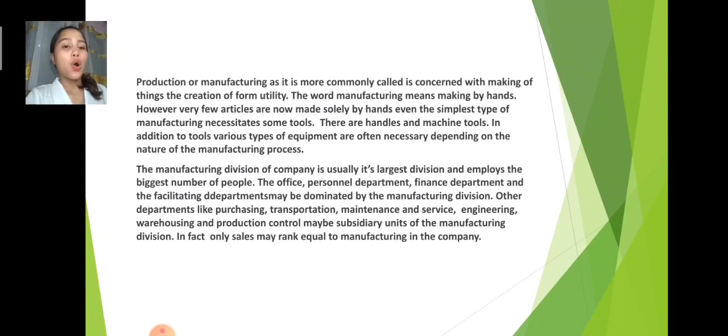The manufacturing division of a company is usually its largest division and employs the biggest number of people. The office, personnel department, finance department, and the facilitating department may be dominated by the manufacturing division. Other departments like purchasing, transportation, maintenance and service, engineering, warehousing, and production control may be subsidiary units of the manufacturing division. In fact, only sales may rank equal to manufacturing in the company.

Types of production processes. The methods by which the materials of industry are produced or manufactured into the things that industry or consumers want are known as production processes. According to the classification, production processes are extractive, analytic, synthetic, and fabricating. So first we have the extractive process.

In some industries, the basic production process is one of extracting substances from the earth or the sea, known as the extractive process. Examples of this process are the mining of coal, lead, gold, and silver, drilling for petroleum, and the extraction of magnesium and other chemicals from the ocean. Second is the analytic process. The analytic process is one in which a basic substance is broken down into a number of other materials which may or may not bear any resemblance to the parent substance.

Third, synthetic process. Synthetic process refers to those industries in which a number of different materials are combined to form a single product. In the manufacture of steel, glass, rayon, and dinnerware, the final end products are quite different from the original ingredients because of physical or chemical changes. In other industries, such as in the production of automobiles, electrical appliances, radios, and television sets, where the materials are merely assembled without undergoing physical or chemical change, this process is sometimes called the assembly process.

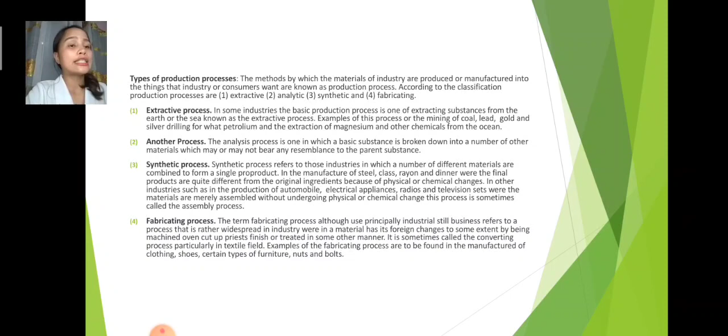Continuous and intermittent processes, a second classification of production processes. Continuous process. Unfortunately, the term continuous process has a dual meaning that is frequently confusing. It is sometimes used to describe a manufacturing situation in which the productive facilities must be kept continuously in operation for a relatively long period of time, necessitating day and night shifts and Sunday work.

Intermittent process. Here again, as with its counterpart, there is a double meaning to intermittent process. In its first sense, the term refers to any manufacturing process that can be stopped at will, for example, at the end of each day, and that can be started up again the next morning with no difficulty. By this concept of the term, almost any industry that operates on a purely one-shift-a-day basis would qualify.

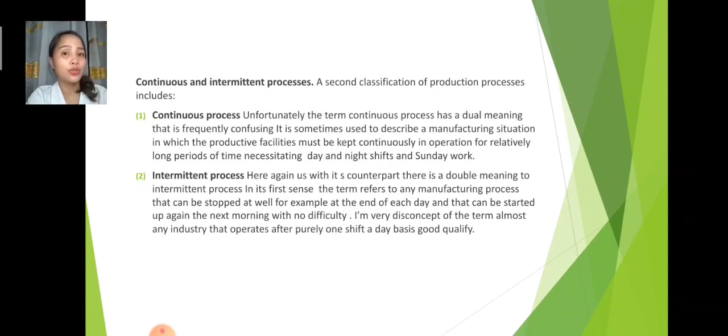Increasing production. Four processes in production have been used to good advantage in marketing, transportation, office management, and other business functions. It is in manufacturing, however, where they find greatest application and are mainly responsible for the progress of industrialization in advanced countries. These processes are specialization, standardization, simplification, and mechanization. So specialization refers to the narrowing of the field of activity. Instead of putting out a variety of radio and electronic products, a company may specialize in only a few kinds of transistors, which it would then develop to a high degree of quality and perfection. Specialization may be applied to processes, equipment, or labor skills.

Simplification refers to the reduction in the number of types, forms, designs, colors, and other characteristics of a product. When a manufacturer of clothing reduces his products to three basic sizes of small, medium, and large, he engages in simplification. If, instead of putting out shirts of numerous designs and interlocking colors, he puts out only a few basic and plain colors of shirts, he is using simplification to reduce his inventories of raw materials, to effect economies and lower costs of manufacturing, and to increase efficiency of the manufacturing process.

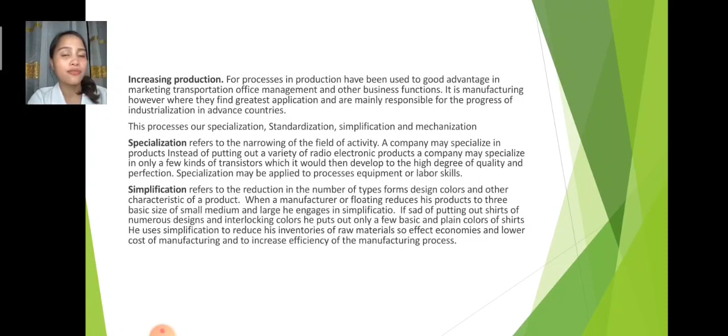Standardization refers to the setting up of standards or norms as to size, quality, form, measure, weight, or other similar features. For instance, electric light bulbs are generally standardized in sizes such that a bulb purchased anywhere can fit a socket in any home. Automobile or jeep parts are standardized by manufacturers to enable production and easier repairs.

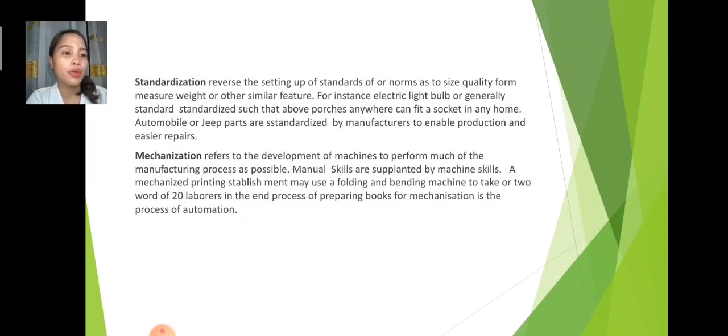There are different formats for calculating pertinent data of the network. Commonly, an average value is determined for the estimated time. Subsequently, the earliest expected time to achieve the activity from the entire network is calculated. This value is the sum of the expected time along the longest path from the start of the network to the event in question.

Finally, the latest allowable time is determined. This is the time by which an event must be accomplished to meet the scheduled completion date of the entire project. It is the value found by subtracting from the scheduled length of the project the length of the longest path backwards from the finish of the project to the event in question.

Factors involved in manufacturing. The manufacture of any article involves the following factors: the design, material, and processing. The design may be standard, static, and unchanging, as in some articles of staple merchandise. It may be variable in substance, subject to change overnight, as in the case of some lines of style merchandise. Or the change may be imperceptibly effected over a fairly longer period of time.

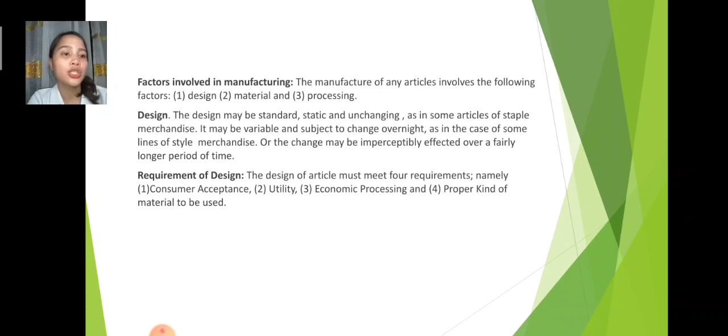Requirements of design. The design of an article must meet four requirements, namely consumer acceptance, utility, economic processing, and proper kind of material to be used. One, consumer acceptance. The design of the article must have what is called consumer acceptance. For example, the article must appeal to the customer's taste or desires.

A shoe manufacturer, for instance, who manufactures a high-cut style of shoes for men would find very little sales for his business. Few men today wear such styles except for occasional needs. If he shifts to boys' and teenagers' shoes of the same style, he may find a bigger market. One of the problems in consumer acceptance is the changing of styles so rapidly that production for stock might be a questionable practice. Again, trying to find out consumer wants is not as simple a process as it sounds.

Two, utility. The second requirement of design is that the product shall adequately serve the purpose for which it is intended. The product must be useful. A beautifully designed, attractive chair may not be strong enough to serve as a chair for day-to-day use. Not too many families can afford purely decorative furniture, especially if there are many children. Utility of an article is indeed an imperative consideration in design. Consumer desire for beauty should be harmonized with utility.

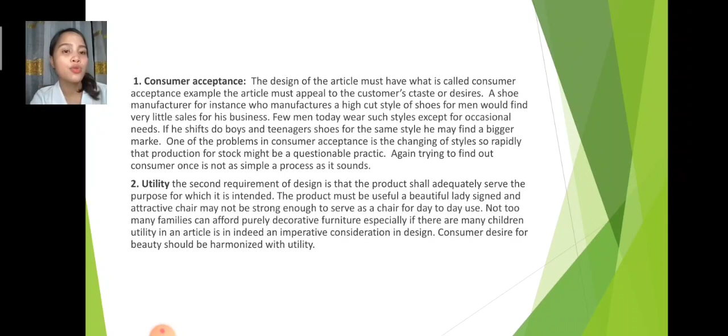Three, economic processing. As a third requirement, the design of an article should not be a cause for the use of an uneconomical manufacturing process. If the design slows down the process of manufacturing, high cost of production will result. This will make it difficult for the products to be sold at a profit. In other words, product design must be carried to a stage where it can be a production design. For example, a design that can be manufactured in the quantity desired and at a cost in line with the price obtainable for the product.

Four, kind of material to be used. The fourth requirement of design is that it must suit the material of which the article is to be made. The material must be able to be worked to produce the design wanted. As an example, we have the case of copper, which is more ductile than any other common metal. Thus, it commands universal use in electrical wiring. Some aluminum wiring, on the other hand, has been developed.

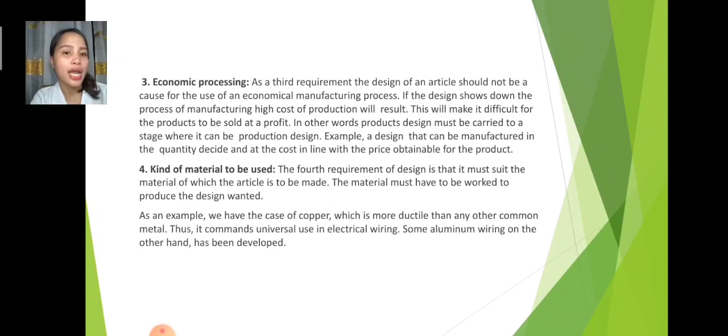Choice of material. As a second factor of manufacturing, the choice of material among other things depends on utility or purpose, durability, and the cost of development and manufacture of the product. Utility: the article may have either a utility purpose or a decorative one, sometimes both. An ornament has little utility if it is merely for decorating something, like a house. Such decorative articles carry temporary considerations. The main considerations in such cases are cheapness of materials and inexpensive methods of manufacturing.

Durability. Articles with a utility purpose are made with some consideration for durability. The choice of durable materials is desirable. At the same time, economical manufacturing is also desirable in order to keep costs down.

Cost of development and manufacturing. Before undertaking to develop a particular product, the management must be able to envisage a return on the product that is commensurate with the cost of development. It goes without saying that this requires not only forecasts on the market for the product, but also knowledge of the time, effort, and requirements needed in its development. Also important is the estimated cost of manufacturing the product, which must be done economically, otherwise the product will be of little use.

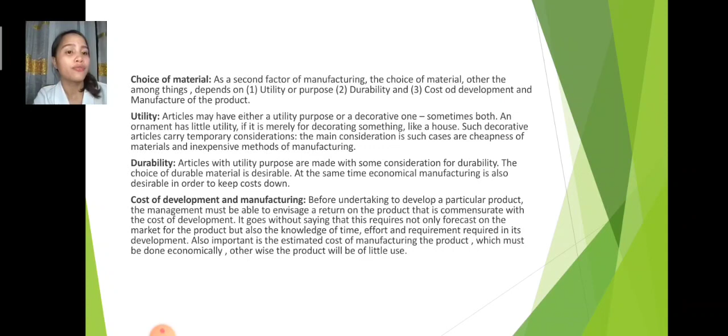Processing. In manufacturing, the third and last factor involved is processing, which requires machines and labor. The proportion, however, of each is seldom the same in the manufacture of two different products. For example, the manufacture of safety razor blades uses highly automatic machines, several of which may be tended by one person. Other processes, however, may need 2 or 3 or more attendants to a machine.

Trend to automaticity. The tendency in machine design is to make machines more automatic in their operation, so that less labor is required. The early printing machine was operated by hand, while the modern printing press is run by an electric motor and fed automatically. The trend is generally toward more and more automaticity.

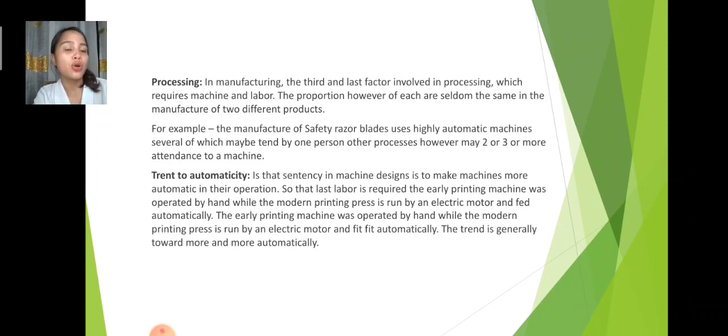Advantages of automaticity. It is obvious that the more automaticity there is in an operation, the less labor is required and consequently the less costly it will be, inasmuch as the cost of manufacturing affects the selling price of the product. It is therefore possible for one manufacturing concern of similar products to beat his competitors in the same field if he can cut costs and charge a lower price for the same quality.

Layout influences production. Another determining factor in production is layout. This refers to the arrangement of machines and equipment in any kind of work according to the sequence of operations. Efficiency of labor. The efficiency of labor likewise has a marked effect on price and market. The efficiency of labor is a complex quality that is based on many factors.

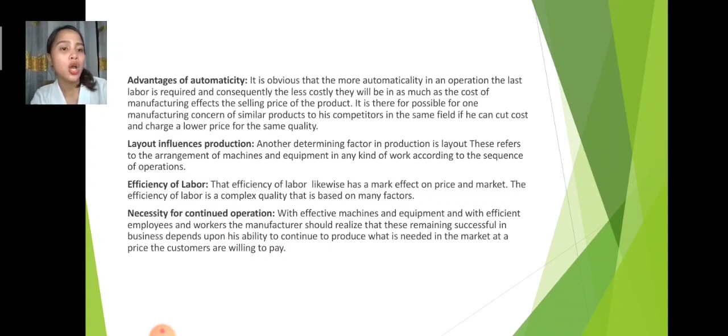Necessity of continued operation. With effective machines and equipment and with efficient employees and workers, the manufacturer should realize that his remaining successful in business depends upon his ability to continue to produce what is needed in the market at a price the customers are willing to pay.

In its highest state of development, therefore, production control consists of a well-defined set of procedures that has as its objective the coordination of all the elements of the productive process, men, machines, tools, and materials, into a smooth flowing whole which results in the fabrication of products with a minimum of interruption in the fastest possible time and at the lowest obtainable cost. Details of the system of production control differ according to the characteristics of the industries in which they are used, but the basic principles are the same.

Steps in production control. Production control consists of a well-defined set of procedures that has as an objective the organization of all the elements of production into a smoothly flowing whole, resulting in the fabrication of products with a minimum of interruption at the earliest possible time and the lowest possible cost. Production control is performed to assist in utilizing designated materials, machines, and men for the proper amount of time and at the right time. Production control, as the term is commonly used, is not restricted to time-use controlling only.

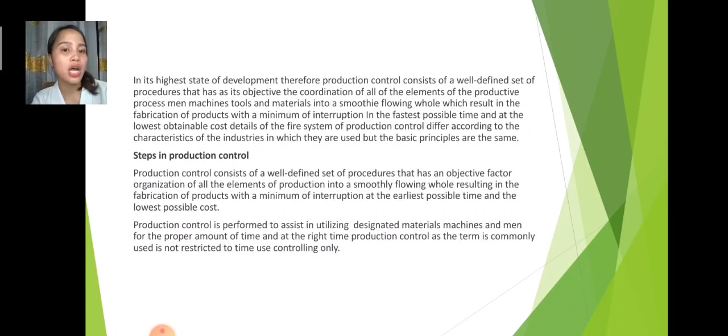Routing concerns the establishment of the path which the production will take in its travel through the plant, setting forth the operations to be performed and the sequence to be followed. The machines and work areas to be utilized at each production step are indicated. In some cases, the specific machine to be used is designated, while in other cases only the machine division is named, in which the foreman determines which particular machine will be used.

Routing also provides data on the time allowed to complete each respective operation. In addition, the exact quantity of each required material with adequate allowance for spoilage and loss is calculated, and the arrangements are completed to have all materials at their respective specific shop location when needed.

Scheduling is the assigning of clock or calendar times for carrying out the various operations. It can be thought of as the time-use coordinator, which seeks to have many operations properly synchronized. Work should not be completed too far in advance of the time when needed, because to do so might necessitate extra handling, additional space for storage, and the possibility of product deterioration and loss during the waiting period. On the other hand, work should not be completed after the time needed because of costly delays and possible disruption of the smooth flow of subsequent operations.

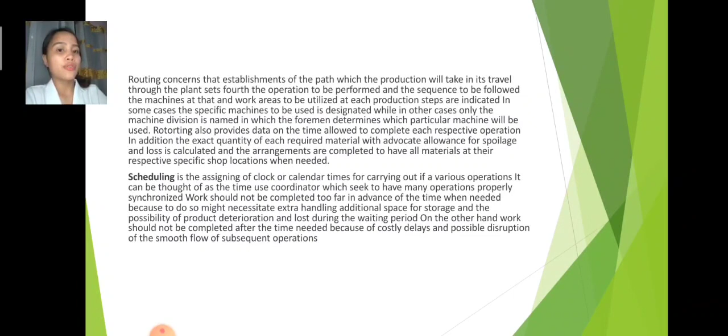Dispatching, the last part of production control, emphasizes correcting deviations. It includes giving work authorization to proceed with specific batches of work at specific times, securing reports on work progress, and granting authority to move materials from one area of the factory to another. Furthermore, information on the progress at each key production step, quality of work achieved, revised arrangements when the original plan is not executed, and the handling of emergencies, situations such as machine breakdown, shortage of help, and excess waste in materials, are among the additional responsibilities included under dispatching.

Without dispatching, production work would not get started when and where it is to commence. The material would remain where it is and operations on it might proceed in a disorganized manner. Changes in routing and scheduling are effected through the dispatching function.